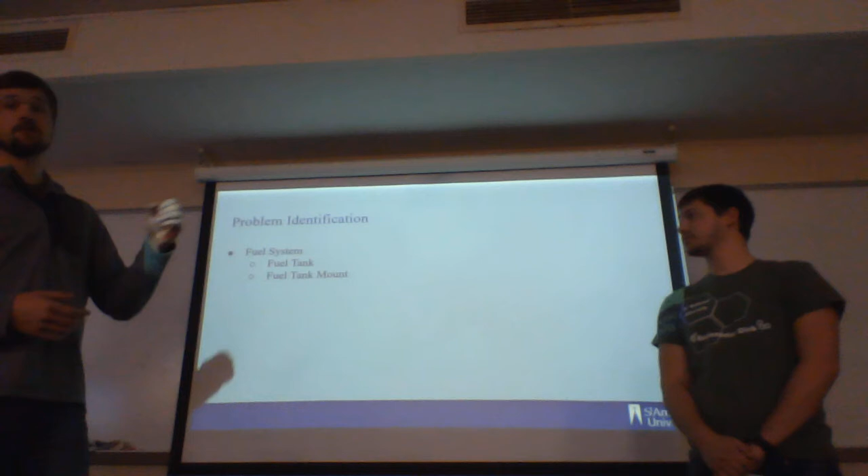The rear suspension all consists of the suspension members, the bearing housing, the bearing, the coilover shocks, the wheel hub, the calipers, and the wheels themselves.

The stakeholders for this project include the committee members Stacy Hanser and Eric Soderstrom, as well as our advisor Dr. Andrew Lutz, and our sponsors Arconic, Cobham, Expert Machining, SAU Design Hive, SAU Student Government, and SAE.

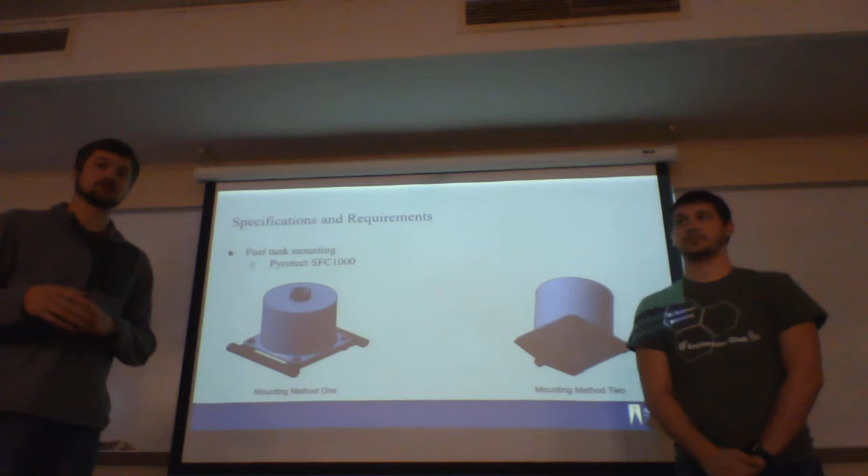SAE implements a bunch of regulations and rules that we must follow in making a car for the competition. This is mainly so groups that have a lot of money can't buy their way into a good placing, as well as to make sure that safe engineering practices are being met.

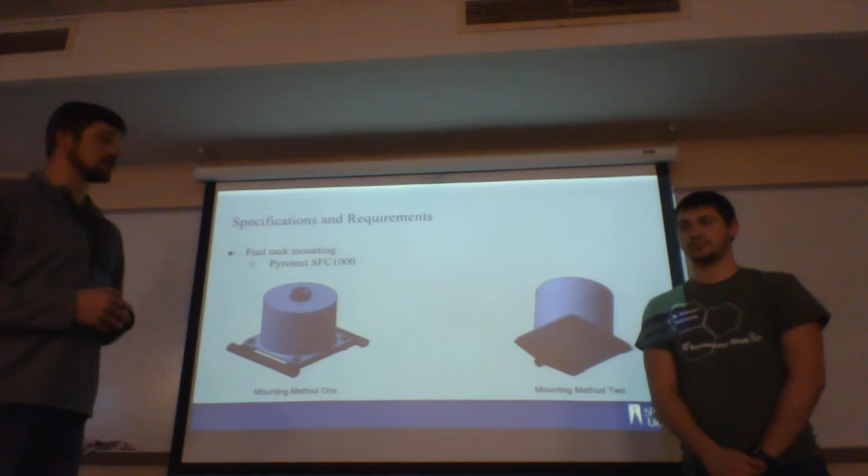One of the regulations deals with the fuel tank. The fuel tank that we are allowed to use is a Pyrotect SFC 1000. This is the only allowed fuel tank for the competition.

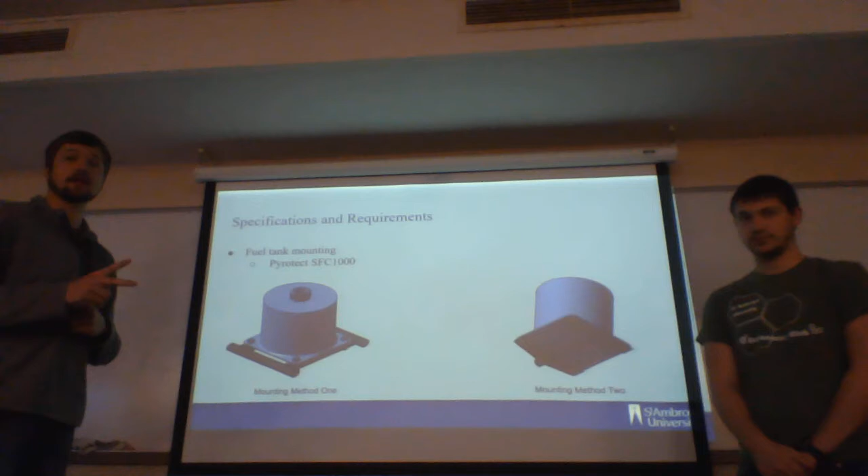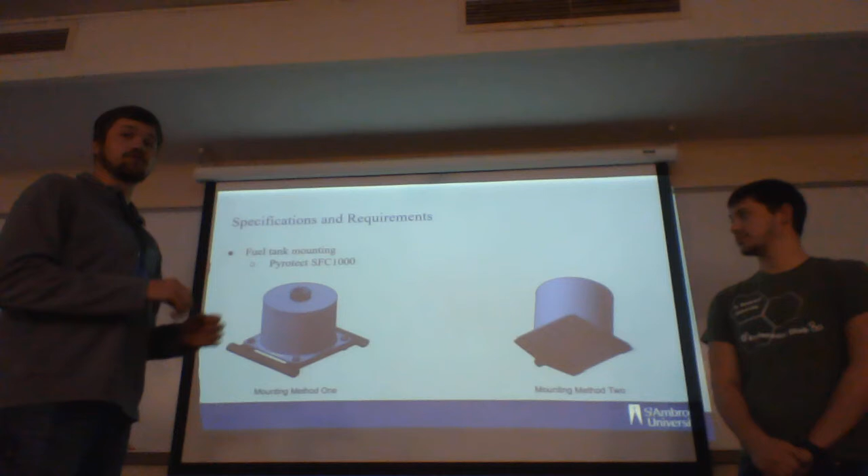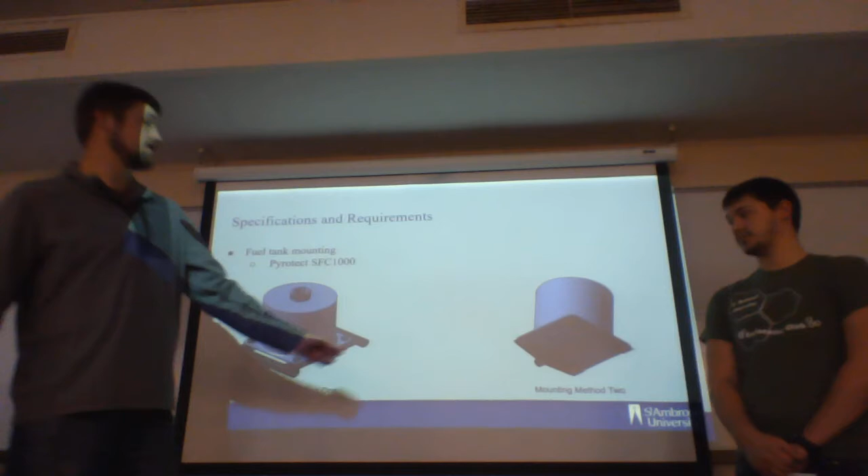There are two different mounting methods that we can use for this fuel tank: mounting method 1 and mounting method 2. Mounting method 1 utilizes two square mounts that the fuel tank sits on with two tubes that connect to the frame, as depicted here. Mounting method 2 utilizes four cantilever members to connect the fuel tank to a tube that connects to the frame. As it turns out, SAE does prefer that you use mounting method 1, but both are allowed to be used in the competition.

Along with that, fasteners for the fuel tank are regulated as well. SAE requires that we use a grade 5 bolt accompanied with a metallic and rubber washer. Then on the other side of the fuel tank is another rubber washer, and then the mounting that you chose. After that is another metallic washer and lock nut. All of these requirements are true for every club.

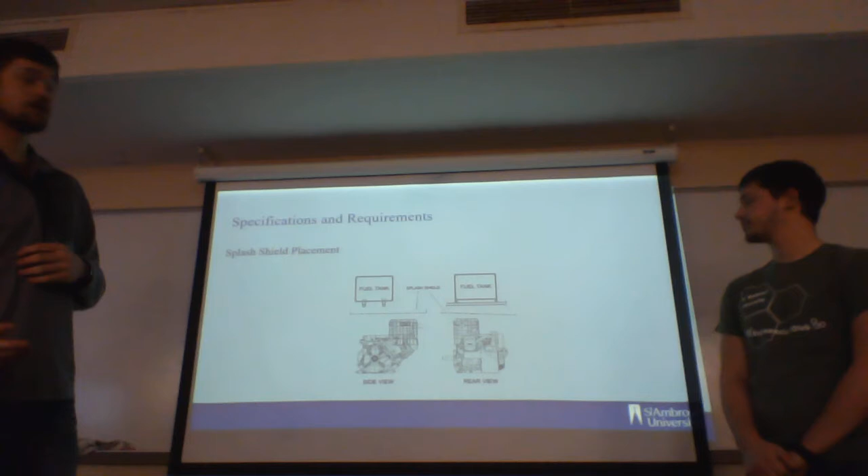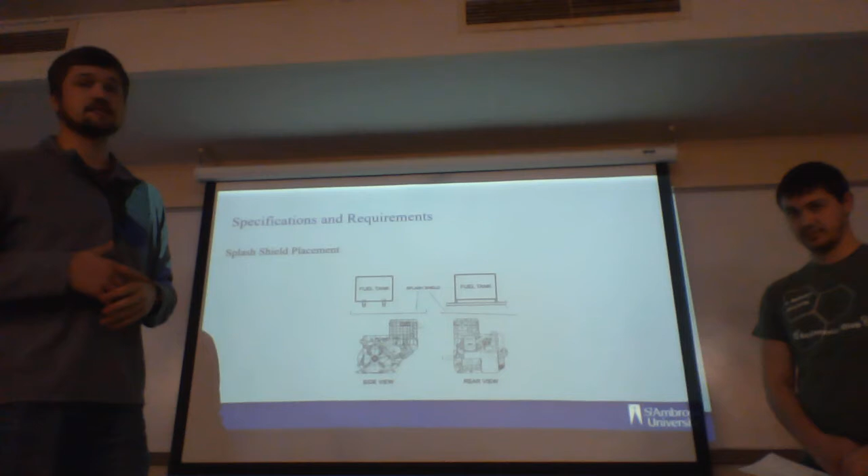In between the fuel tank and the engine, there needs to be a splash shield. The splash shield is in place to try to divert any liquid or fuel that falls down from the fuel tank onto the splash shield and then off the car. It is important to note that the splash shield cannot extend above any of the fuel tank members, and it also cannot extend outside of the plane of the vehicle. If there are any holes being used for a fuel line, that hole needs to be sealed so that no fuel can leak through that hole with the fuel line.

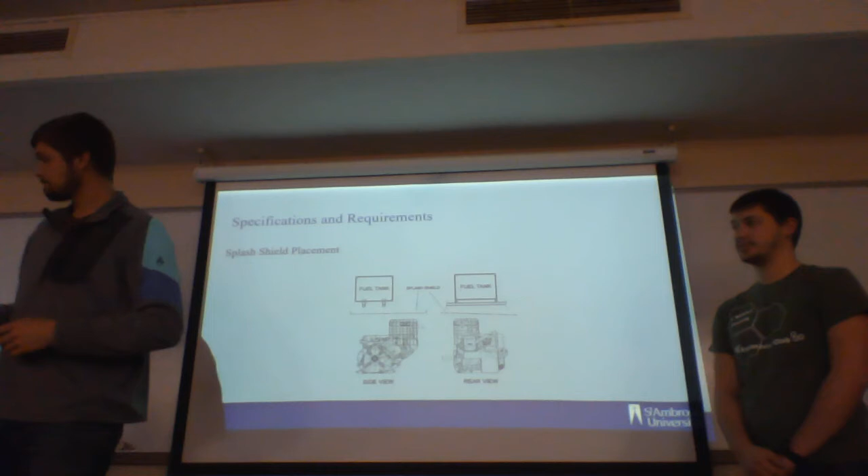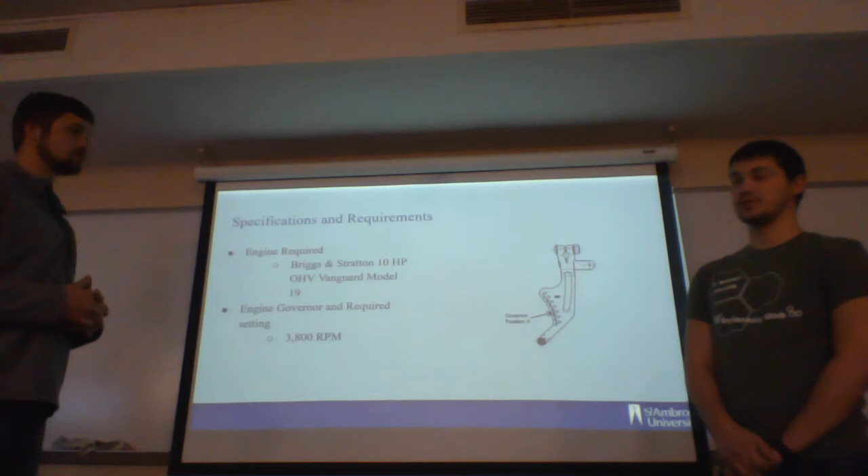They also regulate the engine that you can use. SAE says that the engine for this year is the Briggs & Stratton 10 horsepower OHV Vanguard Model 19, and they also regulate what governor position it can be in - it has to be in position 5, which allows for 3,800 RPMs from it.

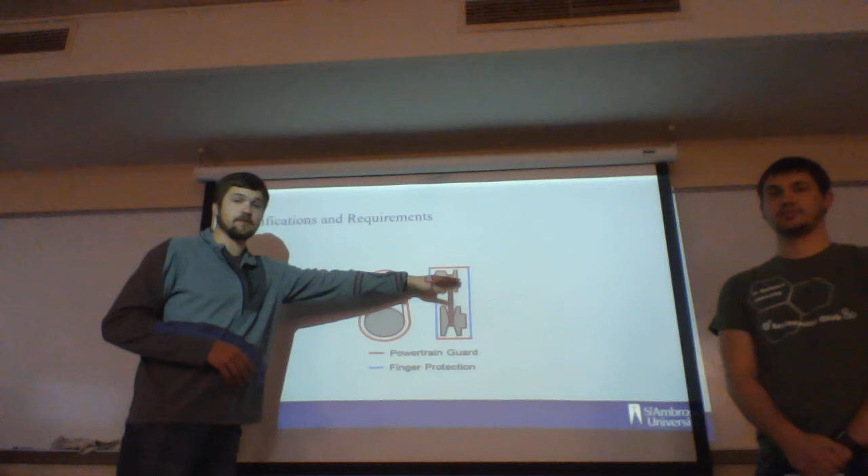The general transmission used in this competition is the CVT, or continuous variable transmission. Here's a depiction of the CVT. This is the driving clutch, which comes from the output shaft of the engine, and this is the driven clutch, which is connected to the input shaft of the transaxle.

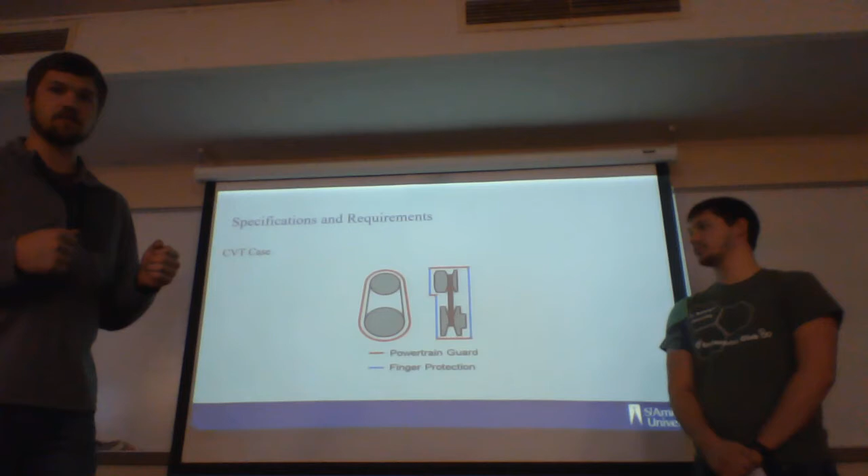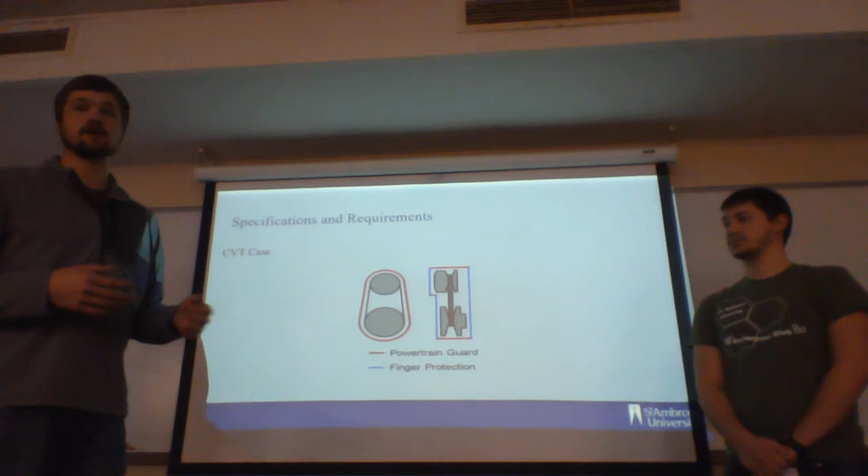There needs to be a case on the CVT to not only protect the CVT from mud and stuff during the competition, but also protect fingers for people who are trying to work on or around the CVT. These red portions, as denoted here, are for the powertrain. These need to be rigid members or a rigid material, like sheet metal, so that no mud or debris can get inside that portion. The blue is for a finger guard, which can just be a mesh or something to restrict a finger finding its way in through the side where the CVT is at.

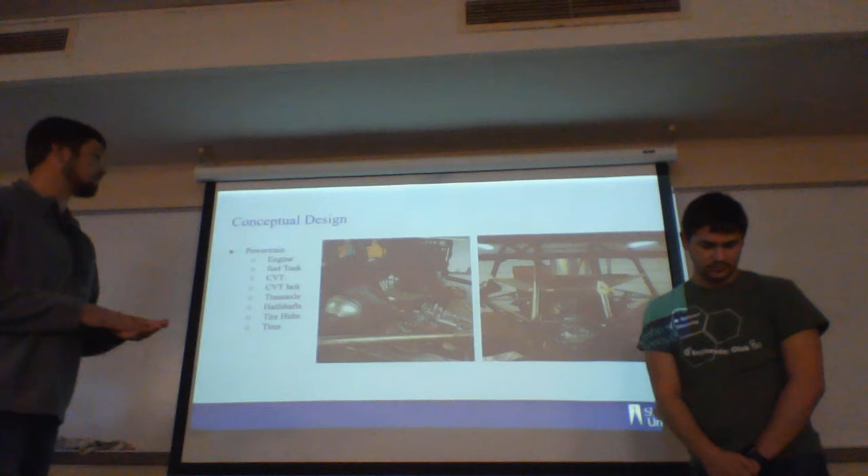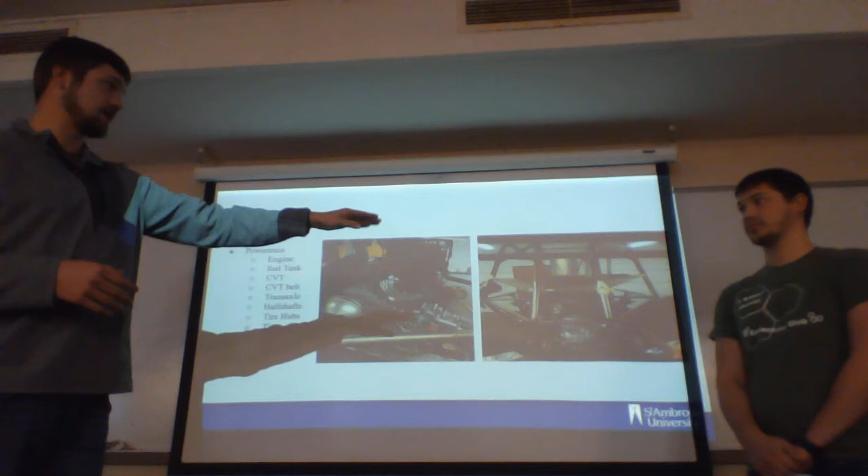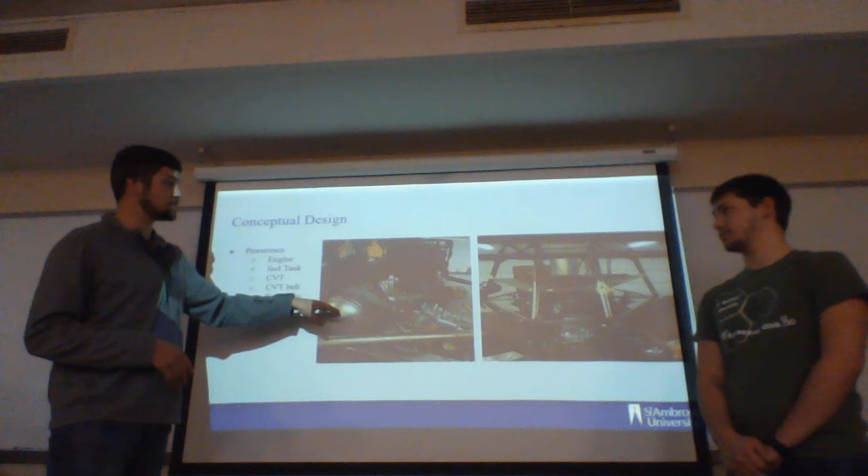So the conceptual design for the powertrain - I'm going to explain the general workings of the powertrain and the fuel system. We'll start with the fuel tank, which is mounted above the engine because our engine is fed through gravity. From the fuel tank, there will be a fuel line that goes through the splash shield and into the engine. The engine will start and produce rotational motion that's translated through the output shaft to the CVT driving clutch. From the CVT driving clutch, motion goes to the CVT driven clutch and into the transaxle. The transaxle is essentially a gearbox that relates motion to the half shafts and then to the wheels.

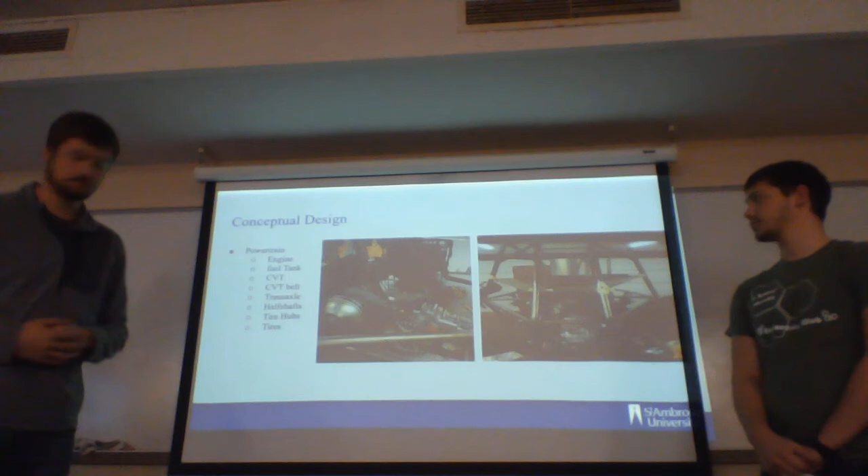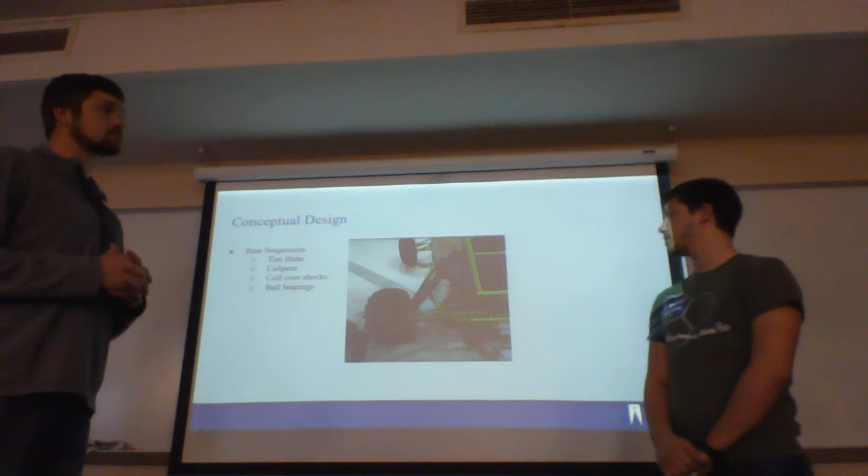How the rear suspension works is it contains the tire hubs, the calipers, the coilover shocks, and the ball bearings. The main point of the suspension is to provide shock absorption from the ground and a better driving experience for the driver.

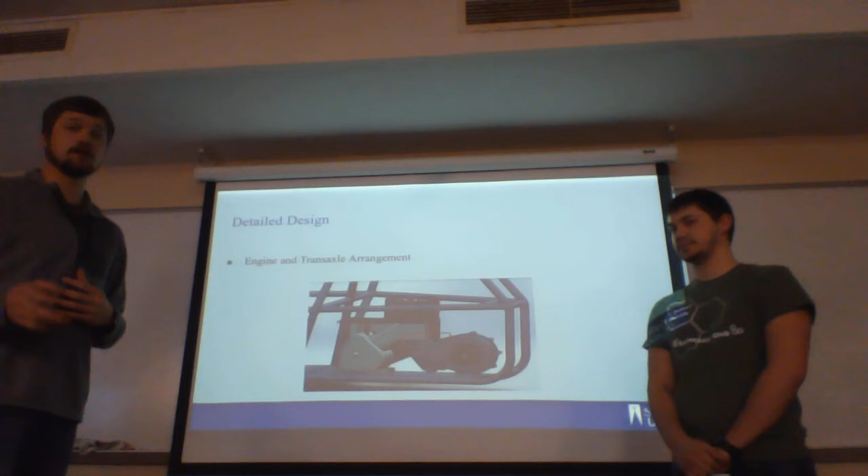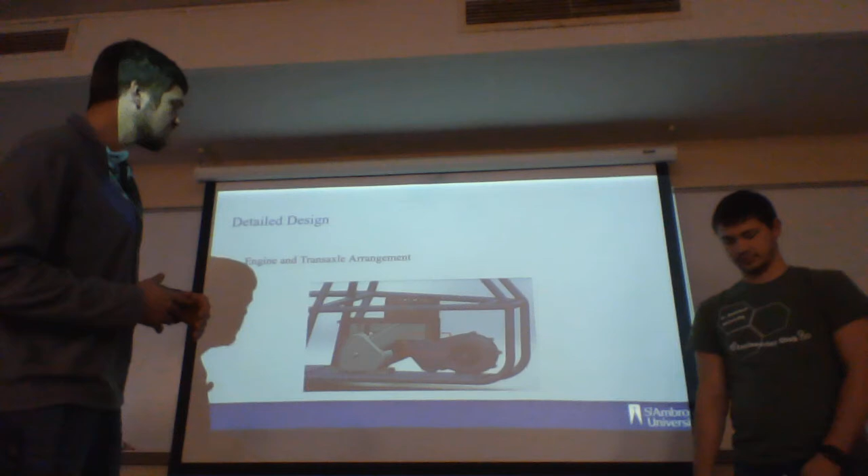Now I'm going to talk about the detailed design and fabrication process of setting up the powertrain components. The first thing we did was set the transaxle and engine on the base plate and the engine cradle to see where they lined up. This is mainly because we didn't actually design the frame for the Baja car - that was done in a previous year, so we weren't sure what the intended setup for the engine and transaxle was. When both were set up on the base plate like this, it was evident there would be interference between the transaxle and engine, making it obvious that we needed to elevate the engine to remove this issue.

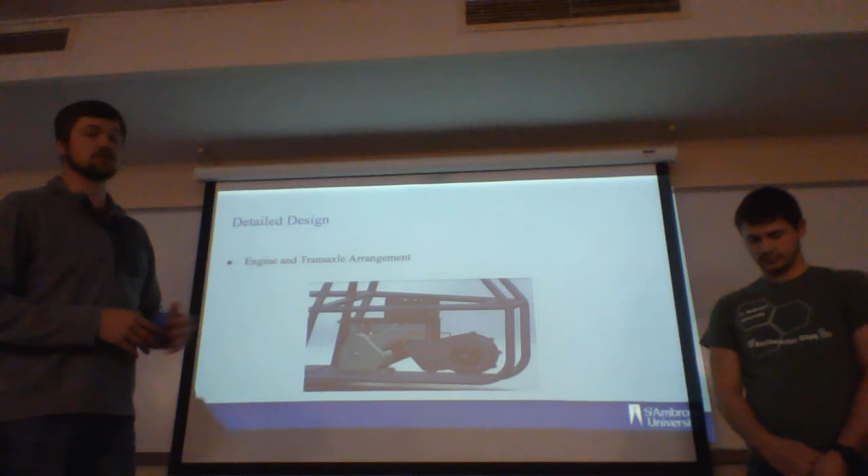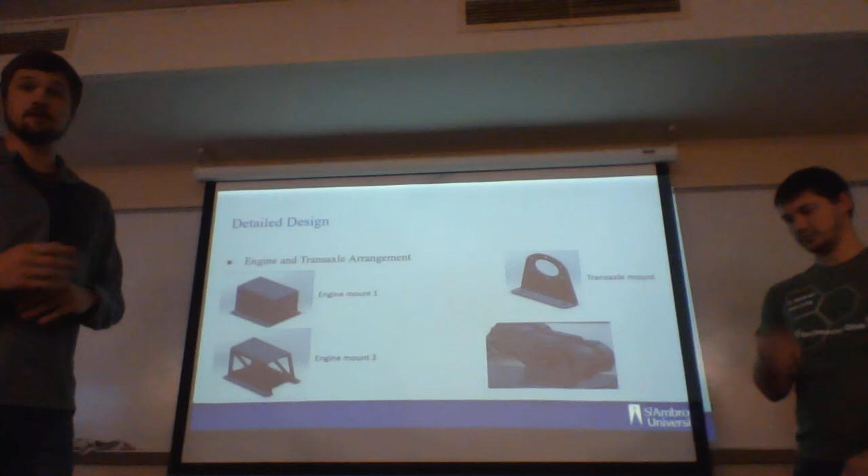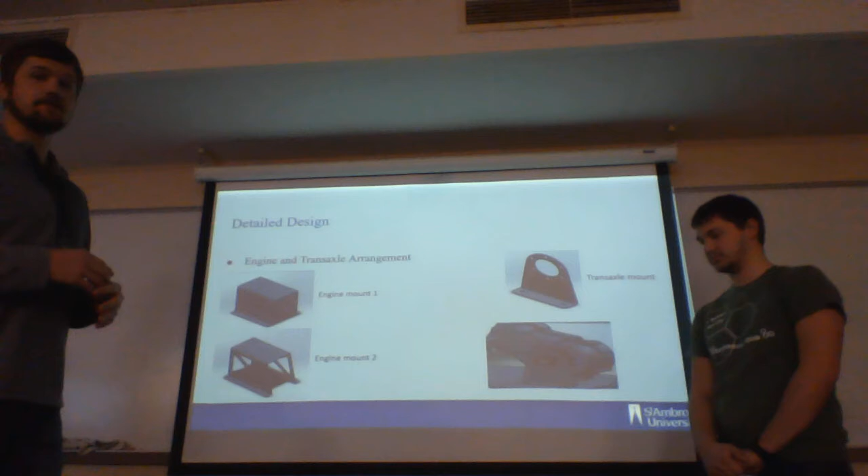With that in mind, two different mounts were created, both in a boxy form. The first is engine mount 1, which utilizes two flanges to mount directly to the base plate and holes on top to mount the engine. We noticed some wasted material was being used in this mounting method, so another engine mount was created with a similar profile, but with holes cut out on the sides and a slant to the front that removed unneeded material while keeping the structure intact. It's expected to be not as structurally sound, but for the application of the engine being on top, it won't cause us any problems.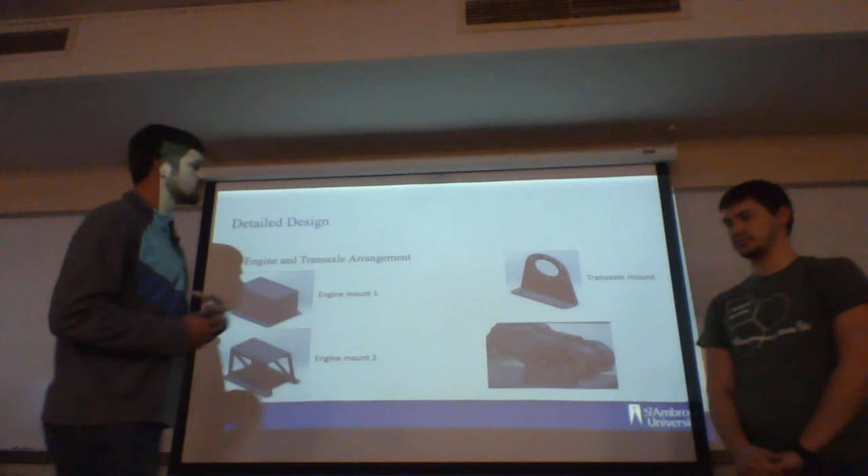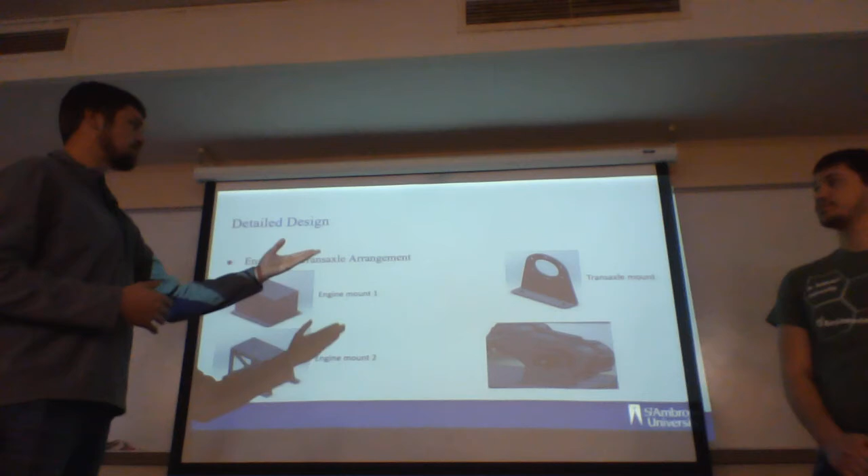As far as the transaxle goes, it's a pretty easy mount to manufacture. There are actually mounting holes on the half shaft port on the transaxle, so we just needed to make a mount that would attach that to the base plate. It's a very simple mount - only one was made, and it served the purpose very well.

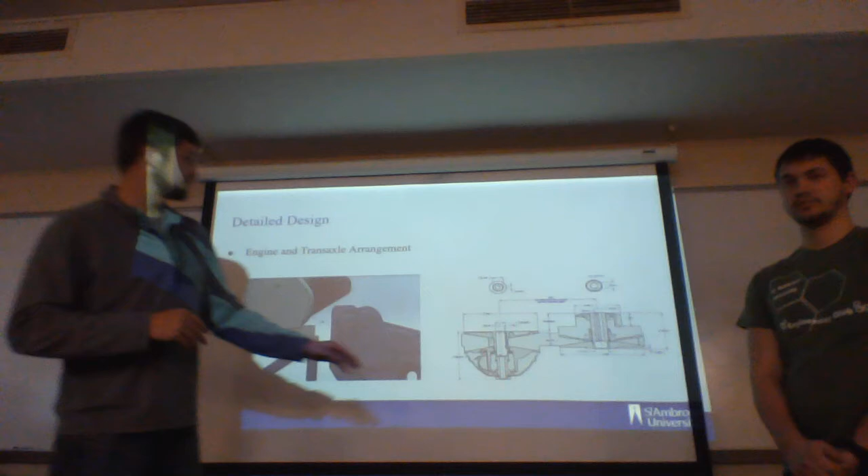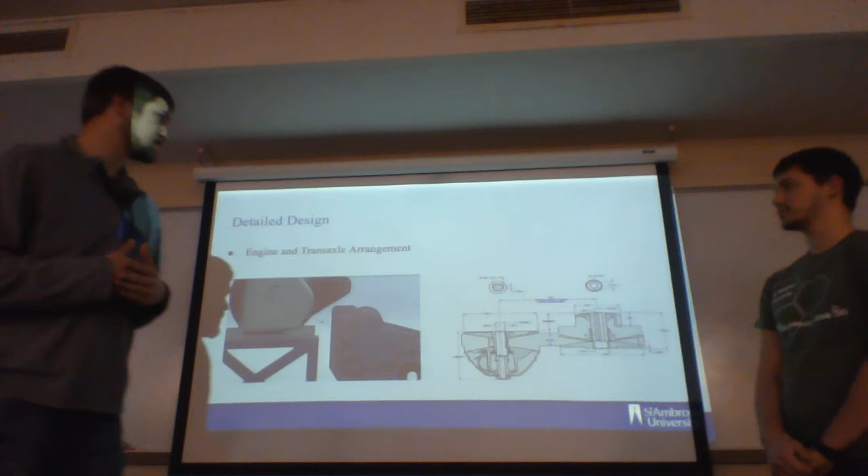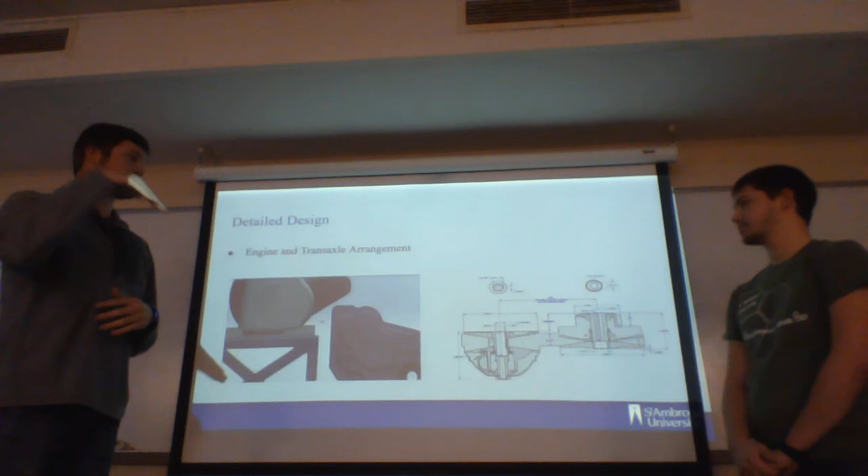Once both were in place, here's an image of the engine and transaxle relative to each other. Now that we had the separation needed, it was important to get the offsets required for the CVT and the CVT belt. The CVT requires a 42 millimeter gap from this portion of the driving clutch to this portion of the driven clutch. It's a bit awkward because you're relating a lateral distance vertically. To do that, we used a caliper and a ruler to relate that distance from the driving clutch to the driven clutch. We knew it probably wasn't 100% precise, but we were confident it was close enough that it wouldn't cause a huge issue.

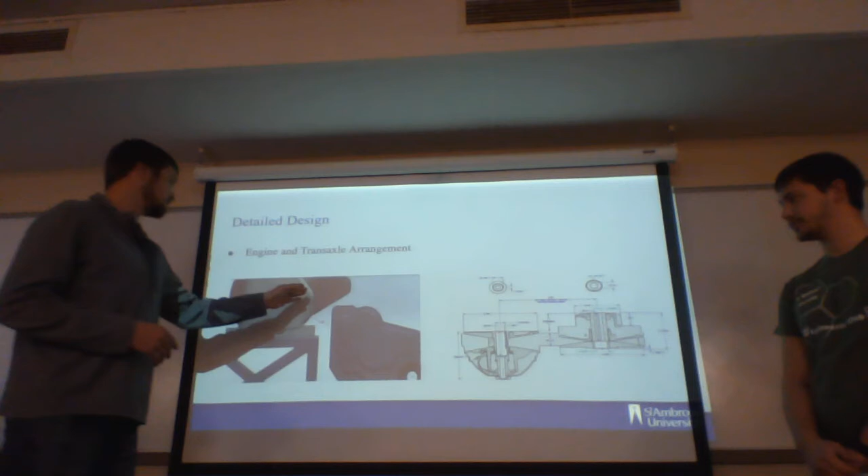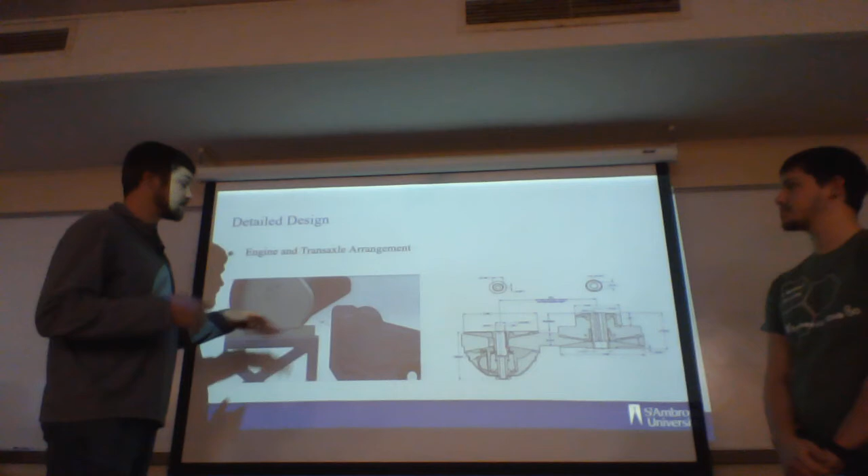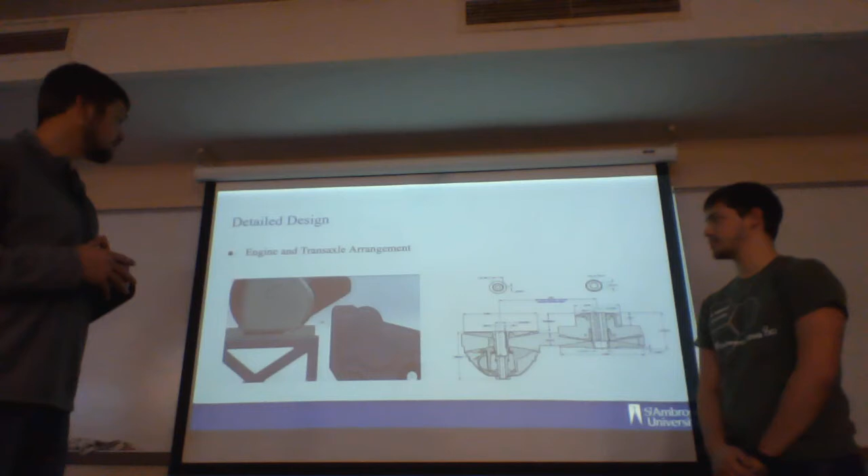The second thing we needed was the front to back distance between the engine and transaxle, due to the belt. Using the belt we're using, it mandates a 9.5 inch distance from the center of the output shaft to the center of the input shaft. To do this, we found what the distance would be using the outside diameters of each. Mr. Hanser provided us with an aluminum block machined to about the precise distance needed. By inserting the block in between, we were able to get that distance easily, and then both mounts could be fastened down to the base plate.

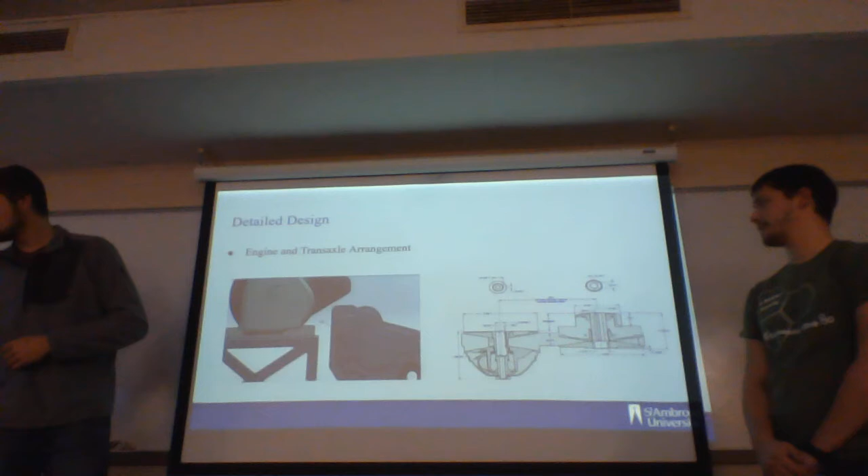Once they were fastened down, we were able to put the CVT clutches on and put the belts on. And as you can see here, we have a nice straight line from the driven clutch to the driving clutch. That's very important because there are some implications that can happen if this was done incorrectly.

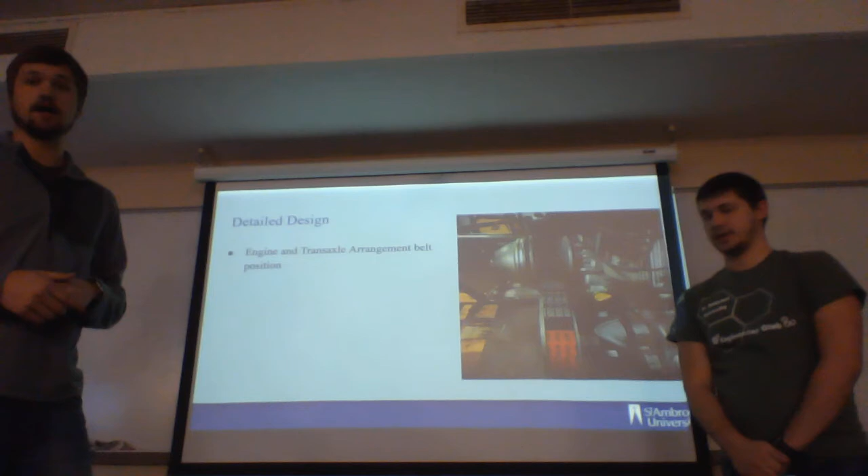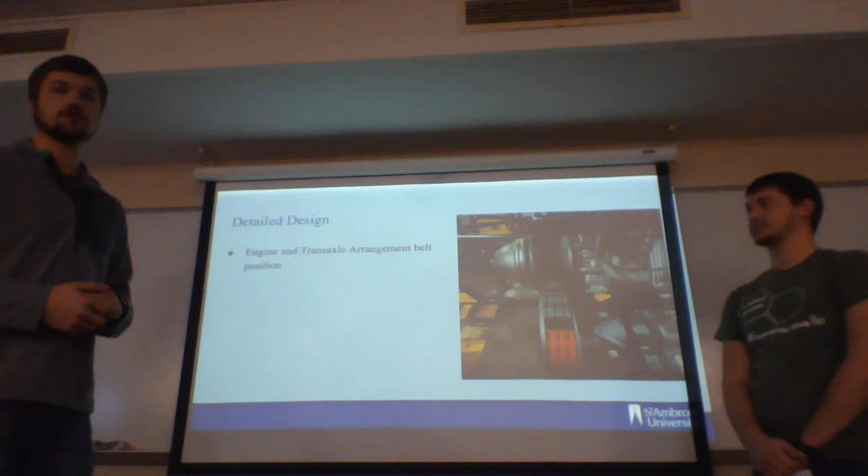If the lateral distance was wrong, we would have rubbing within the CVTs. This would greatly decrease the life of the belt itself. For competitions like an endurance race, it would really hurt our time if we had to change belts during a race. They're also not cheap, and having to fund the club, it's just better to save as much as possible.

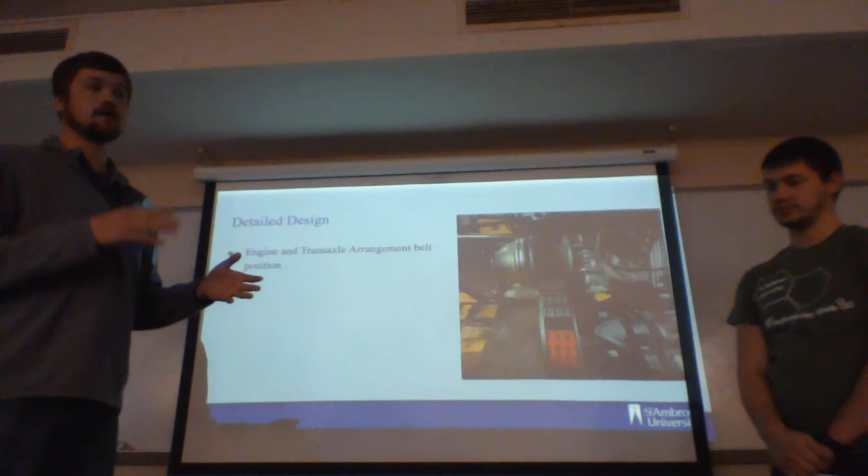As far as the front to back is concerned, if they were too close together, they would be loose, and that would cause slipping on the belt, and there would be less rotations relayed down to the driven CVT clutch. And if it was too tight, it would cause extra strain on the driving CVT shaft, and that would also hurt our efficiency.

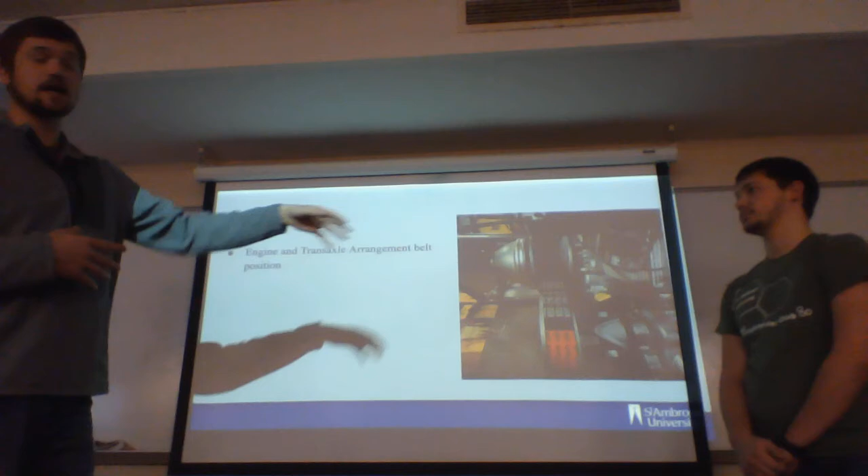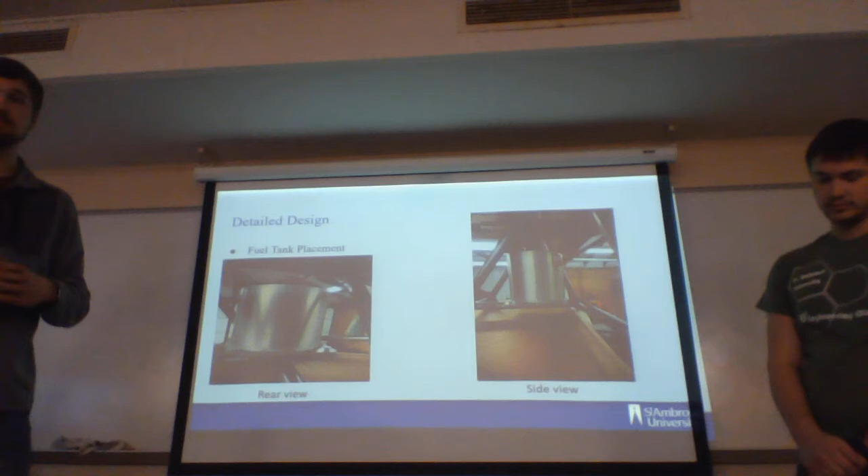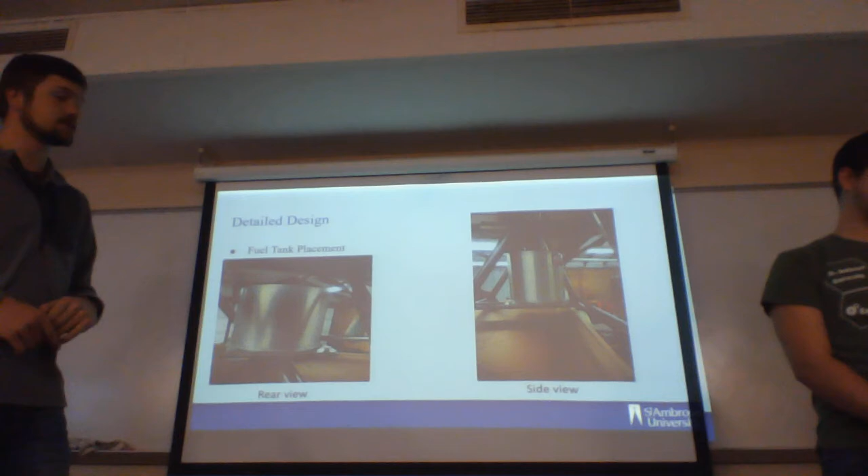As far as the fuel tank, as stated before, that is mounted above our engine. We decided to go with the fuel tank mount that had the four cantilever brackets. Although this wasn't the preferred version that SAE wanted us to do, it worked out best for us because we had some scraps that were able to be cut and put into the same formation that they wanted with their brackets. With that created, we added a secondary member for it to be mounted on, and then another secondary member on the rear. It was very simple to put on.

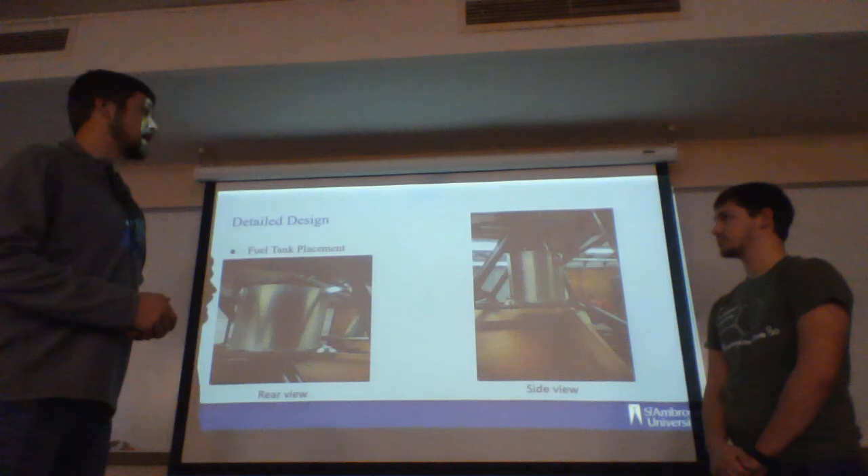It is now currently tacked. It just needs a full weld, but it's in place. SAE also mandates that the engine itself cannot break any of the planes within the engine cradle. By the use of a dowel rod, we were able to check all the planes, and it is well inside. As far as rules are concerned, it abides by all of them.

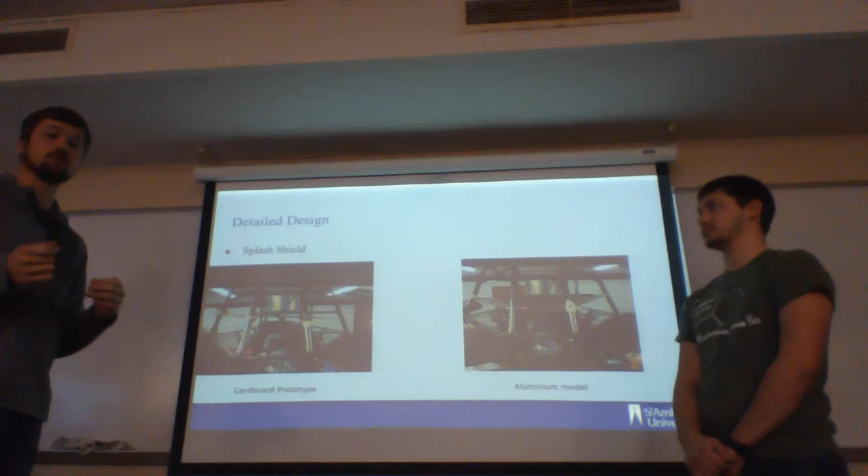So in between the engine and the fuel tank, as mentioned before, is going to be a splash shield. To get the splash shield designed correctly, we had to actually make a prototype. This is due to the fact that we did not make the rear cage, and when it was made last year, it had some human error and wasn't 100% symmetrical. Because of that, we couldn't use the SolidWorks model for it, as it would give us incorrect measurements.

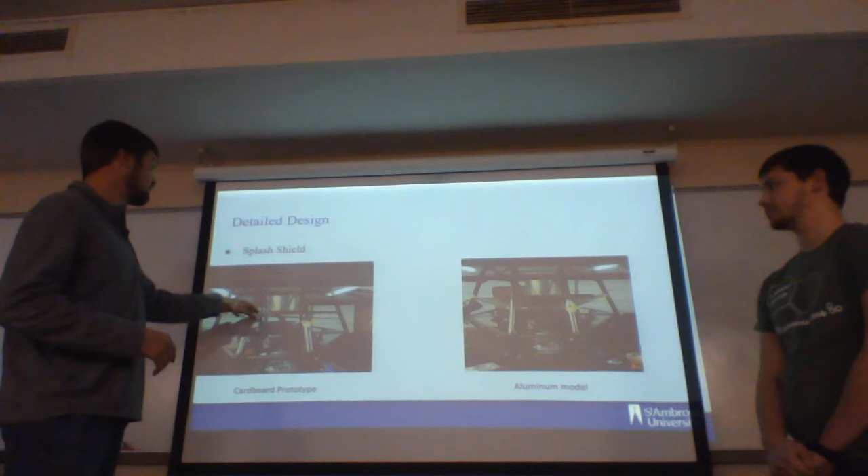So by use of cardboard, we were able to cut it to the direct dimensions that we needed, place that on some sheet metal, cut that out, and then we had the profile that we wanted.

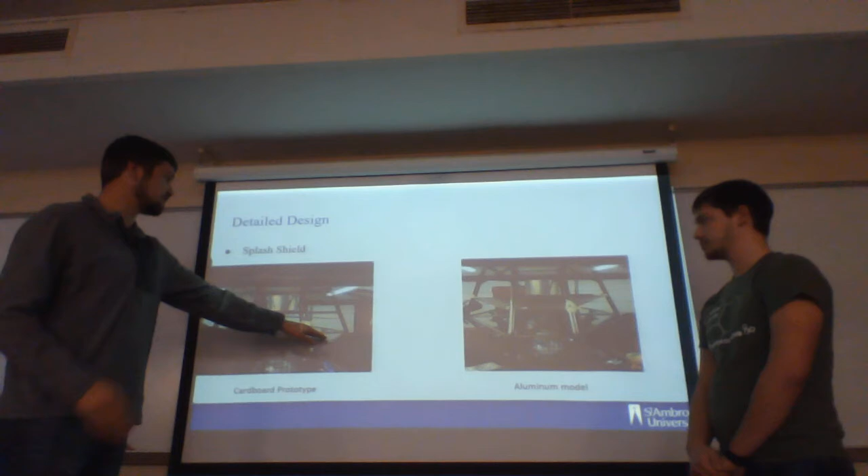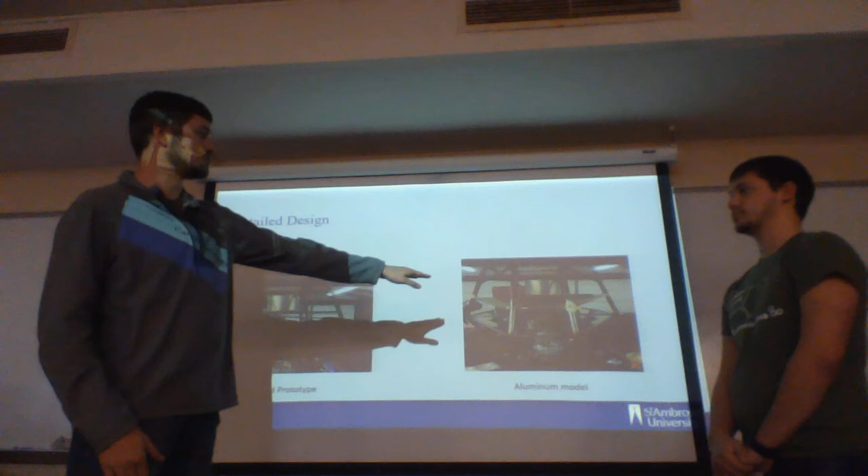The first idea was to divert as much liquid as possible off to the side of the vehicle. This gave us concerns with liquid possibly going in between the back edge of the splash plate and the firewall. So to combat that, it was decided we would change the orientation to try to direct the flow off the back of the vehicle. This was nice because the tilt of the splash shield would divert it that way, as well as the movement of the vehicle would also pull it back.

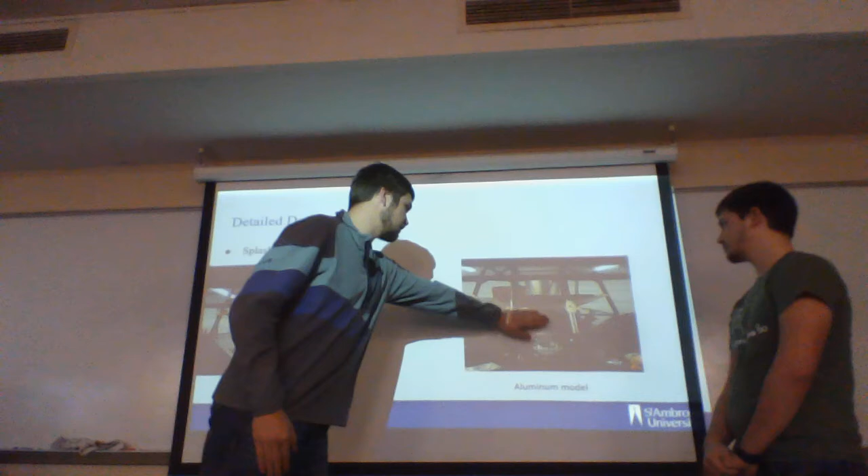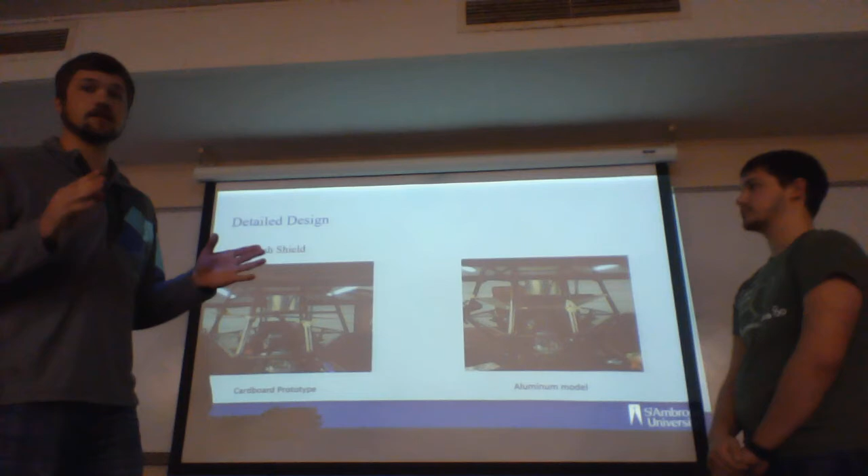With this mounting method though, another plate is going to be required. That's going to have to go here to cover the transaxle. That is not going to be a difficult thing to do. A few tabs and it'll be done fairly quickly. It's also anticipated we'll need some angle iron to further ensure that no liquid leaves the path that we want it to take.

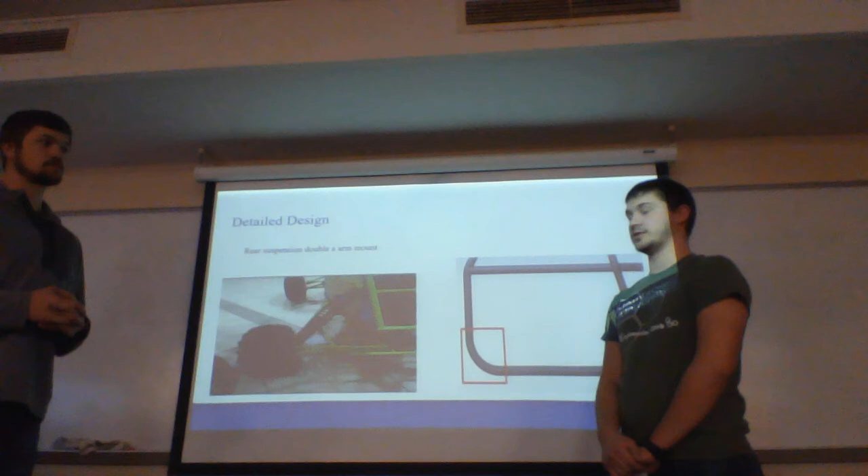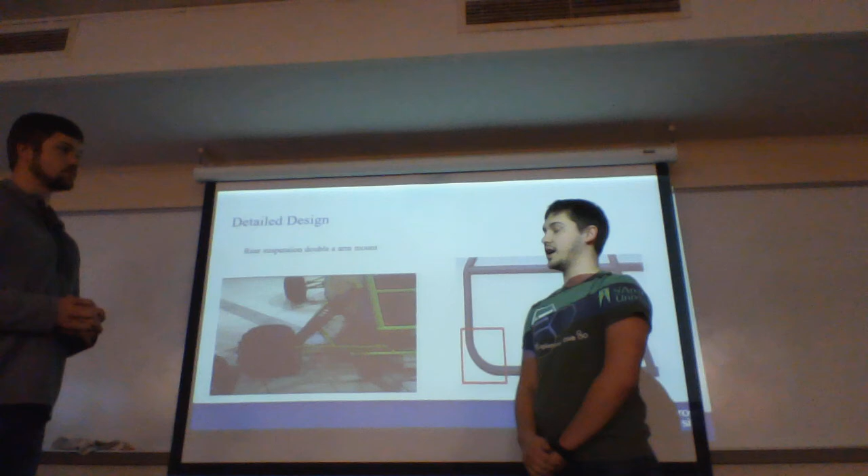So when we started our designing for the rear suspension, we first started by researching other already existing suspensions that are out there. We turned to the University of Wisconsin-Platteville's idea of using double A-arms. In their design, they utilize a double A-arm, one on top, one on bottom, and a separate bearing housing. What this allows is the A-arms to use a hinge method, and this provides a simple rotation of the suspension, which would relate to an easier mount for the shocks and would produce less stress on the mounts for the shocks.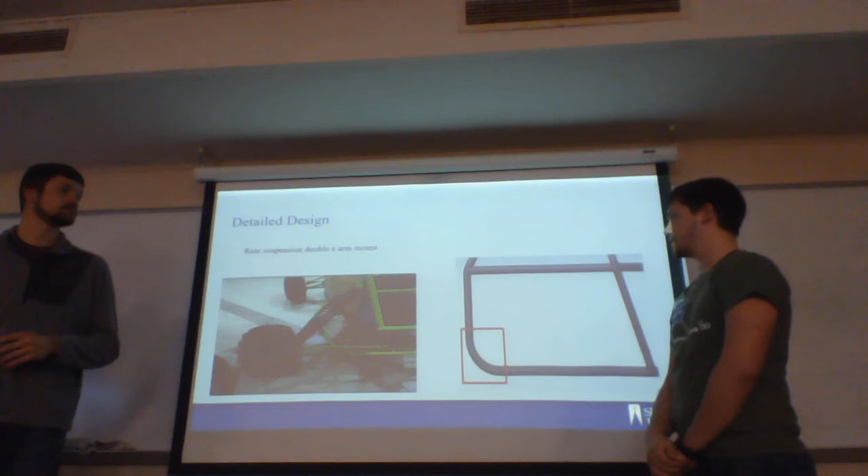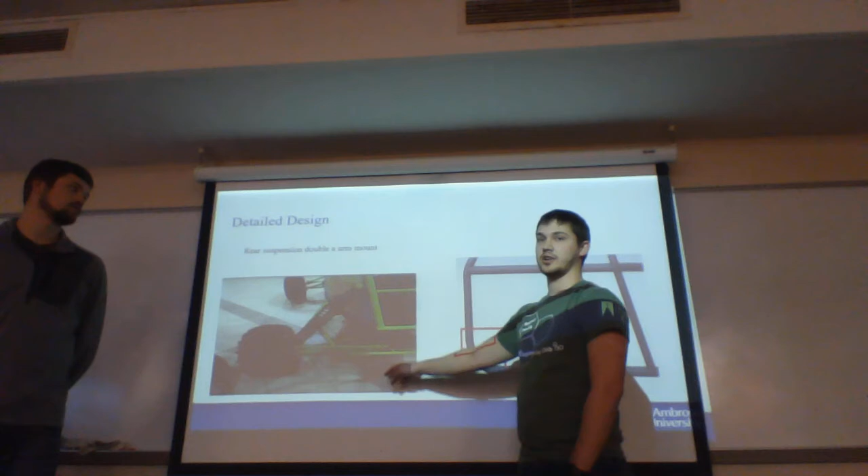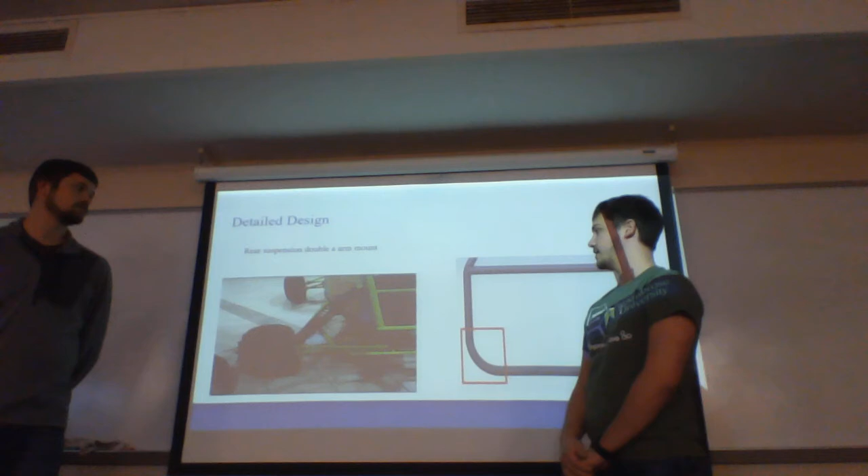However, when we made a model and put it into SolidWorks, it was very apparent that this idea probably wouldn't be the best for us because of this rear bend in the back of our engine cradle. As you can see in Platteville's design, their hinges are as low and vertically on top of each other on the car as possible. This is due to how the A-arm design works, and it provides the best possible performance. But with our current frame, it just doesn't work with this kind of design.

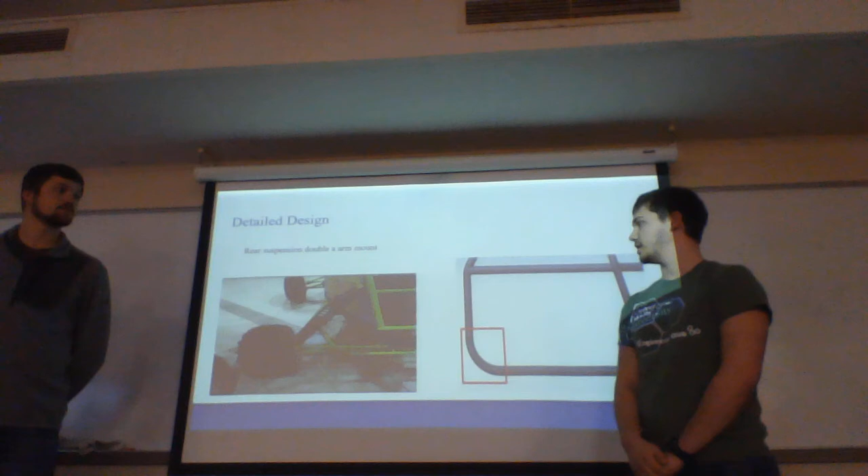Because of this, we branched off into other rear suspension designs and came up with a trailing arm with two radius rods. The bearing housing would be incorporated into the trailing arm itself, and all the members would be attached by rod ends. Rod ends allow for greater room of error in the motion of the rear suspension.

However, this could lead to more stress felt by the shock mounts while in compression. But we think we have a spot where we can mount the shocks so it wouldn't make that much of a difference. So after we came up with this design, we tested two different possible positions for the radius rods.

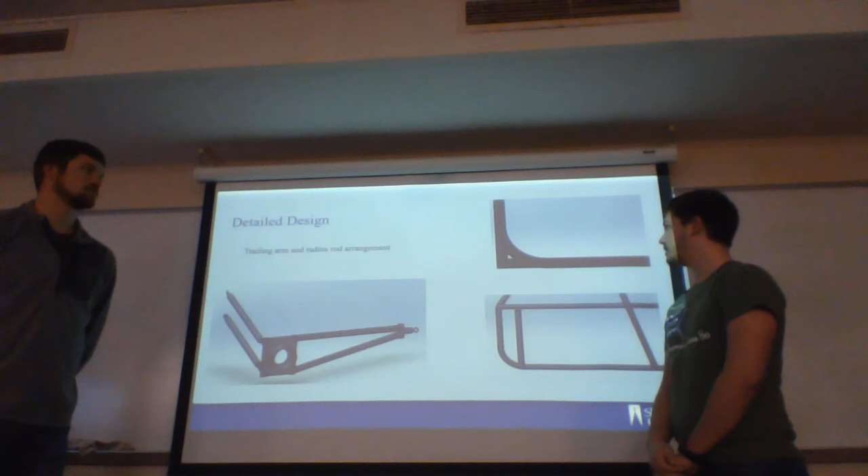After both of these mounts were made, a test was run with the two to see how they would perform on the model.

After putting this in the model and moving the suspension around a bit, it was very evident that the second method would be best. This is because the radius rods are more parallel with where the half shaft comes out, and thus follow the profile of the half shaft better.

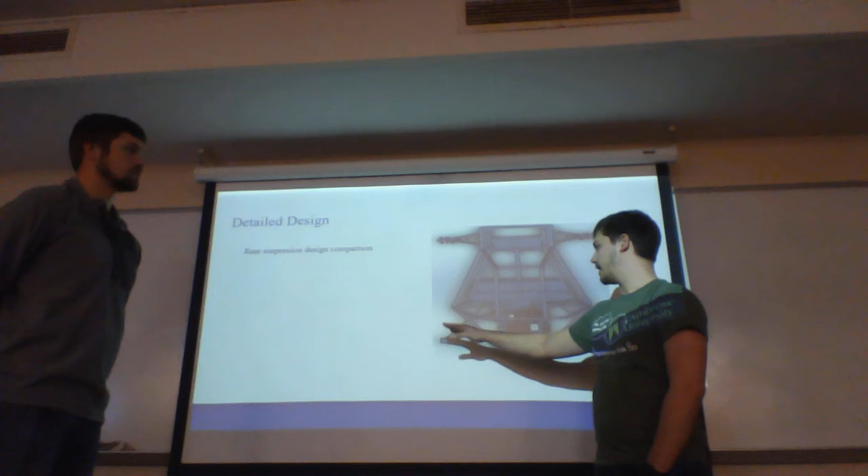Over here, the half shaft would want to kick out the bearing housing, and with the radius rod positioned here, it wouldn't allow that kick out, which could cause problems with the suspension while being compressed. Whereas over here, where it's parallel, it follows the profile better and allows the trailing arm to swing out along with the half shaft.

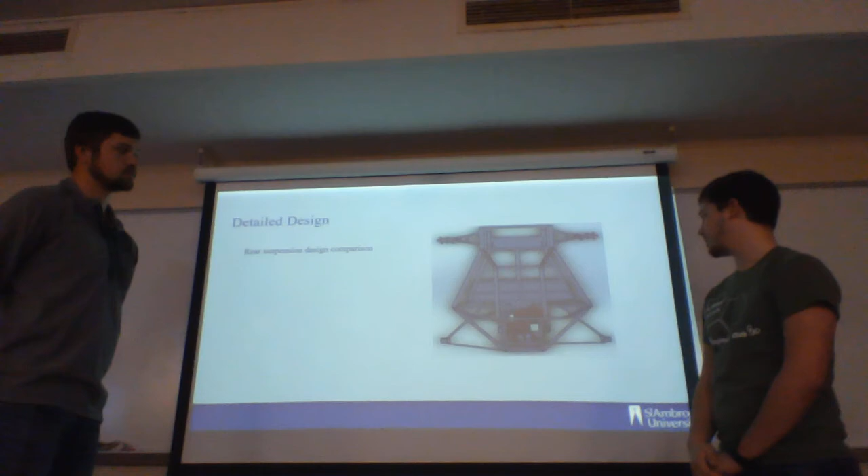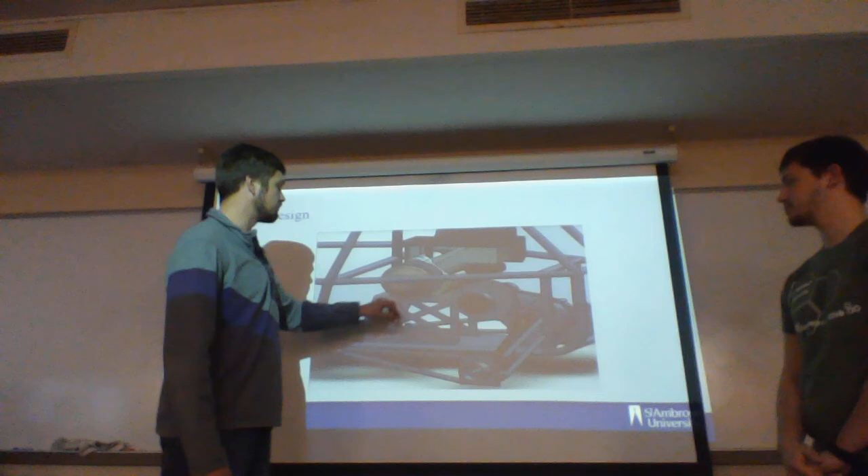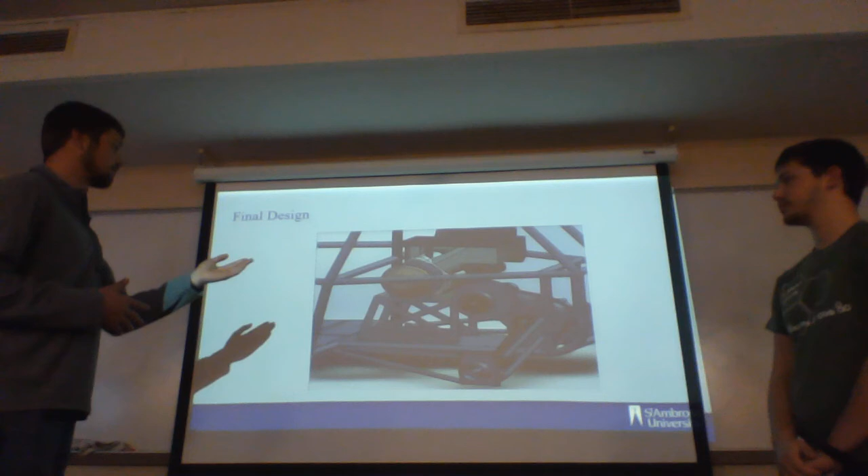Here is the mounting with the engine, transaxle, and the CVT that we mentioned before, which is planned to be in place. Here is the rear suspension design we talked about earlier. What's not incorporated yet is the coilover shocks and the fuel tank, simply because they haven't been designed yet, but once they are, they'll be incorporated into this final design. This is roughly what our rear suspension and powertrain should look like when fully fabricated and finished.

The splash plate is also almost all the way done; it just needs a few more tabs to fully secure it to the frame. The rear suspension has been fully modeled, and the material for it has been ordered and is in-house, just awaiting fabrication.

Overall, we've realized that this competition, preparing for and designing a vehicle like this, has been really good experience for us as soon-to-be engineers. That's because we get a front-end view of the design portion of creating something like a vehicle, but also the back end—we're not just designing, but also building. So we understand how the design portion affects the building portion, which is really important, because you can design something that works in the model but in real life it might not work for a whole slew of reasons. That's really important information for us to learn and has benefited us a lot so far.